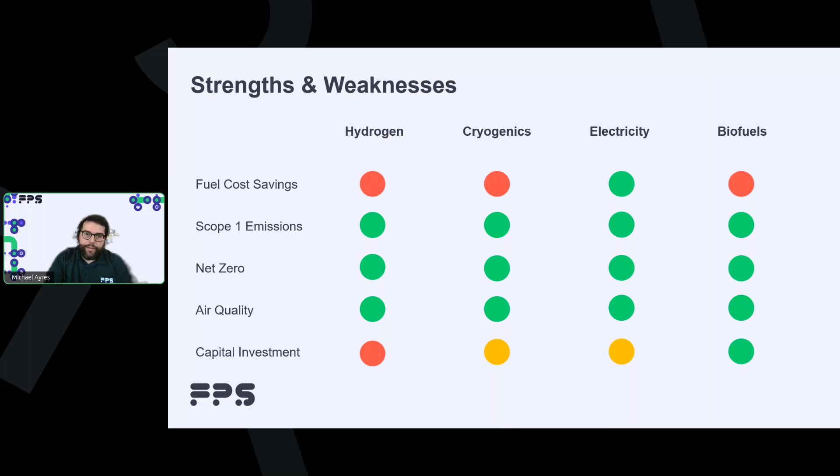Cryogenics and electricity are somewhere between hydrogen and diesel technology in terms of cost premium, and that's principally driven by volume. And then you have biofuels, which potentially could have almost no equipment change in order to make them feasible. It's probably worth flagging the reason why we can't simply adopt biofuels at this time, which is to do with the availability of feedstock.

For sure, it's possible to get HVO in significant quantities, or biomethane, such that you can perhaps decarbonize an individual fleet. And many fleets are using this fuel at the moment as a really valuable part of their transition. It bridges a gap in the short term, whilst the other technologies on that list are in the development phase. However, there's insufficient biofuel feedstock to enable us to completely decarbonize the commercial vehicle fleets that we operate in the UK, and so they can only ever really be a transition technology.

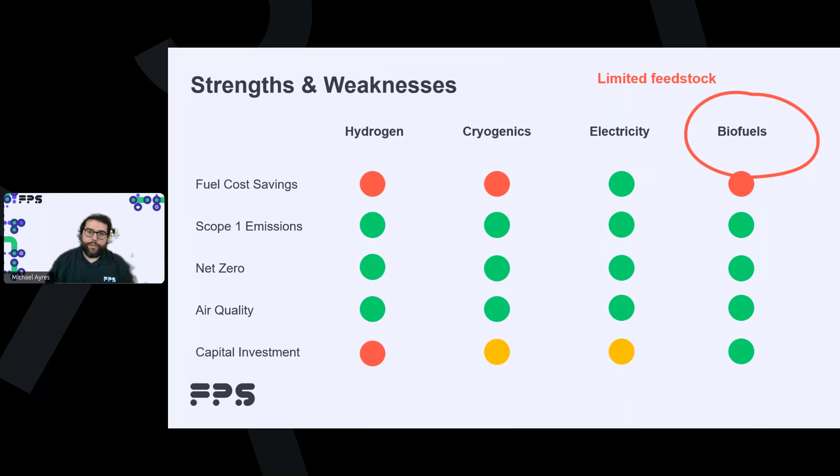So one of the questions that we get quite frequently is whether electric transport refrigeration units can be cost effective, given that we believe this to be the most likely long-term solution to decarbonising transport refrigeration. And the answer to that is that it depends. It depends on how efficient those TRUs are. It depends on what you assume about fuel costs. It depends on how expensive you think they are to purchase, the duty cycles you're doing, and even factors like the weather.

But what I thought I would do today is share some economics as we understand them, because it's useful to put numbers around a situation like this. And I think that we can show you some of the dynamics that we see when we're looking at deploying electric transport refrigeration units. As ever with transport refrigeration, many of the numbers are in debate, so we'd certainly be interested to hear from anyone who thinks that the numbers are different to the ones that I'm about to show you.

So I'll start by giving you an indication of the technology assumptions that we've used for this analysis. So we've got capital costs for purchase of single and multi-temp fridges. We have fuel costs on a pound per litre and pound per kilowatt hour basis. These slides were made prior to the start of the conflict in Iran, and so may be adjusted as a result of that over the coming months.

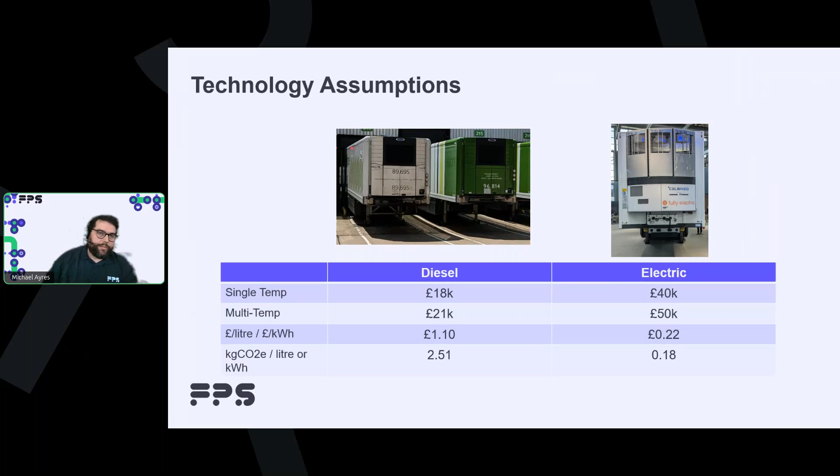The next thing that you need to know if you're about to compare the economics of electric refrigeration with diesel refrigeration is how much fuel the transport refrigeration unit is likely to use. And the answer is that it depends as well. It will depend on the transport refrigeration unit; there are dramatic differences between models and brands, and also the age of the transport refrigeration unit will make a difference.

There are differences in terms of insulation, set points, operating bands that you set the fridges to, the duty cycle that you put them on in terms of whether you've got set points for frozen or chilled, how many door openings that you have, the length of those duty cycles, and also the weather can affect that.

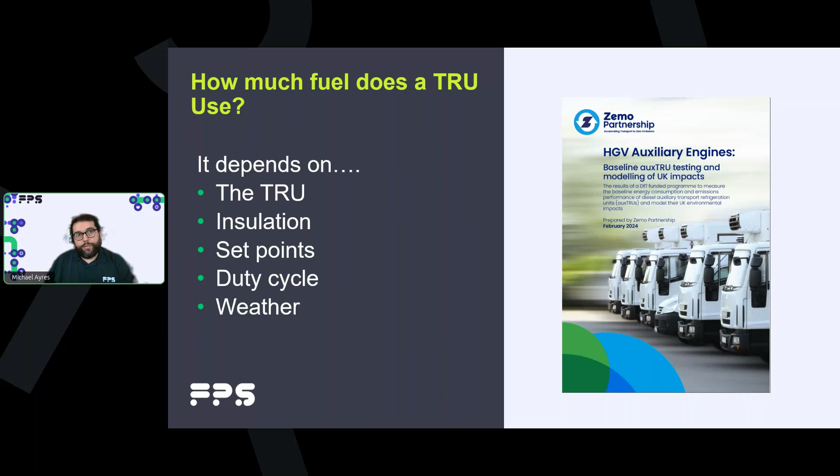As a useful start point for this type of analysis, there's a generic duty cycle that was developed by the Zemo Partnership to try and quantify the fuel consumption and emissions impacts of transport refrigeration units a few years ago. I can give you an overview of the cycle. It's highly simplified compared to the multi-drop operations that some of you may be undertaking, but it's useful in order to be able to drive a comparison.

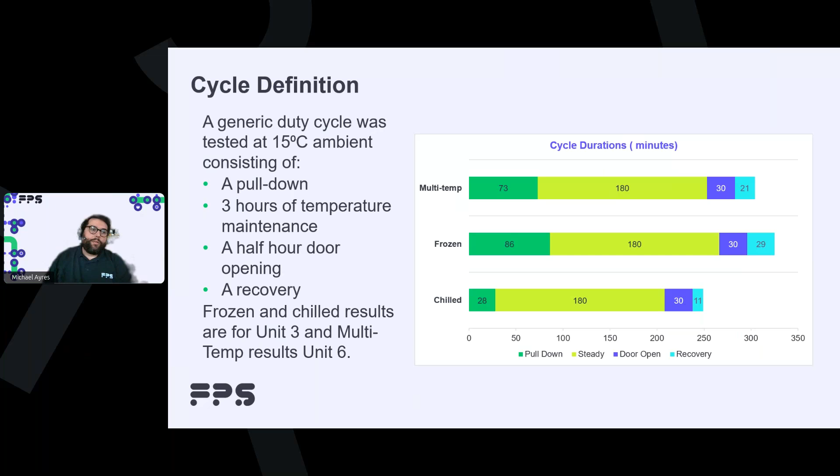So the testing took place at 15 degrees C ambient temperature. The duty cycle started with a pull down, which took varying times depending on the set point that was trying to be achieved and the fridges. And then a consistent 3 hours of temperature maintenance, a half-hour door opening, and then a recovery. Through this analysis, we've tracked frozen and chilled results, as well as multi-temperature results, so you can see the comparison between them.

So each one of those individual duty cycles used a different amount of fuel. As many of you would expect, the least fuel was used for the chilled duty cycle, an intermediate amount was used for frozen, and then the multi-temperature configuration actually used more fuel in this set of testing.

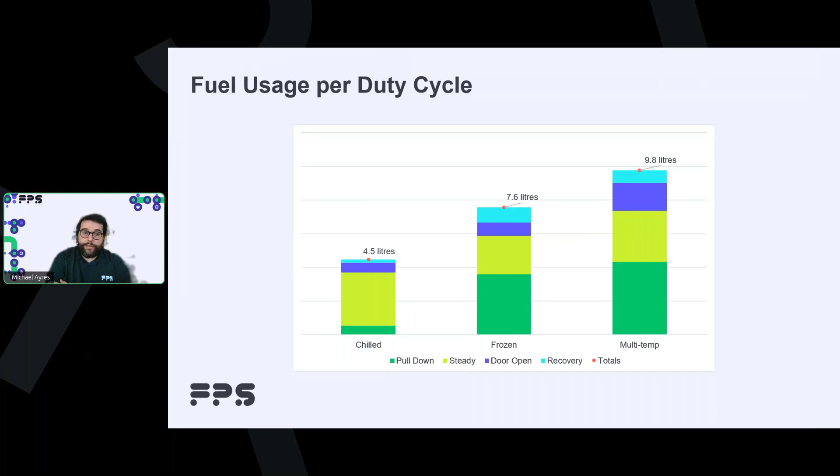The other feature you'll notice of the fuel usage profiles that you can see here is that for chilled, the most energy intensive part of the duty cycle is ongoing temperature maintenance over an extended period. Whereas when you look at frozen operation, the pull down process is much more energy intensive, and that has implications for where that energy consumption is likely to take place.

Now, few, if any, operators do just one shift per year, and so you need a mechanism of understanding how those individual test results may translate into years' worth of fuel consumption. So what we've done is looked at a model of the number of shifts like that you might complete across the week, and used that as a driver for our sensitivity analysis, going from doing 5 shifts per week, which would be 5-day-a-week operation, single shift, all the way through to 7 days a week, triple shifting the fridges.

And you can see in this chart here what the distribution is of implied annual fuel consumption. At the very bottom, it's 1,600 litres of diesel a year. At the very top end, you're knocking on the door of 11,000 litres per year.

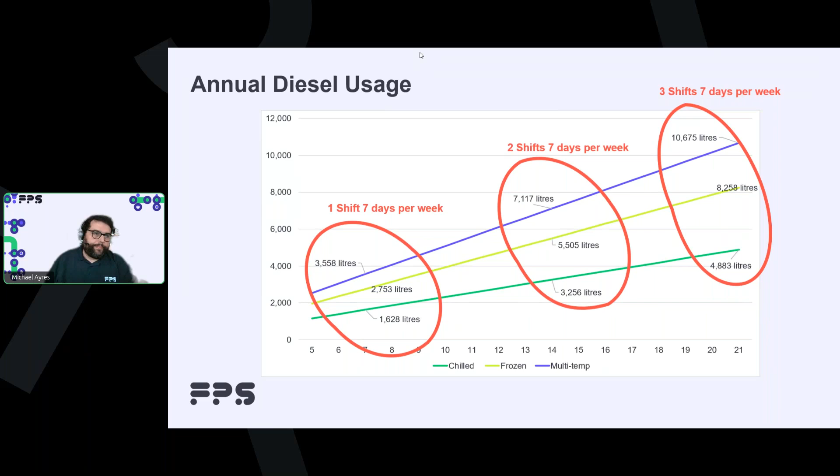Now, if you have got an idea of what your fuel use is, you need to have a view of what your likely diesel consumption and your likely electricity consumption would be to accompany that. Actually, it's relatively straightforward to perform this conversion. We know what the energy density of diesel is. We know the likely part load efficiency of a diesel engine. We know the likely mechanical efficiency of a drive shaft. So we know probably how much of every litre of diesel's potential is going into the shaft of the vapor compression cycle to cool the fridge. And the answer is probably about 2.4 kilowatt hours of that initial nearly 10 kilowatt hours of energy that you have.

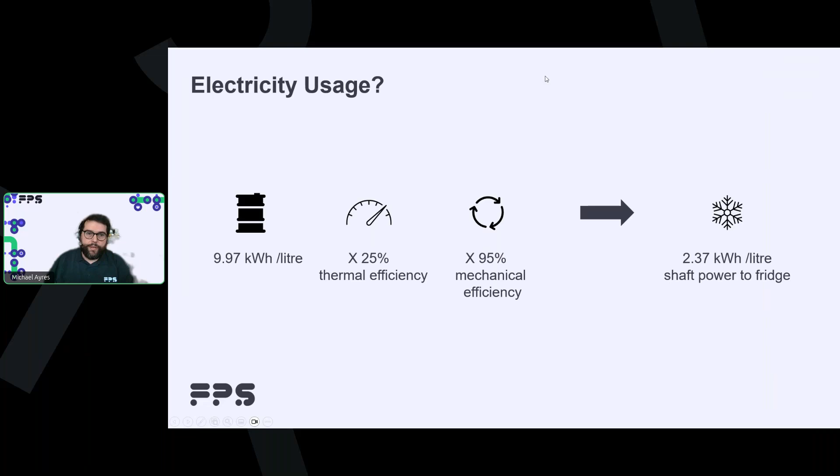It's a little bit more complicated than that because there are differences between electric transport refrigeration units and diesel units. It might be in terms of motors for braking energy recovery. It could also be solar, which is an incredibly popular component in these systems. If you look on a generic basis at a 10% capacity factor, and you imagine that you can cover the entire roof of a trailer with solar panels, you can get quite impressive quantities of energy generated. You can see, for example, with a single shift chilled operation, it's 160% of the total required energy. For the more energy intensive cycles, you'd end up around about half or a quarter.

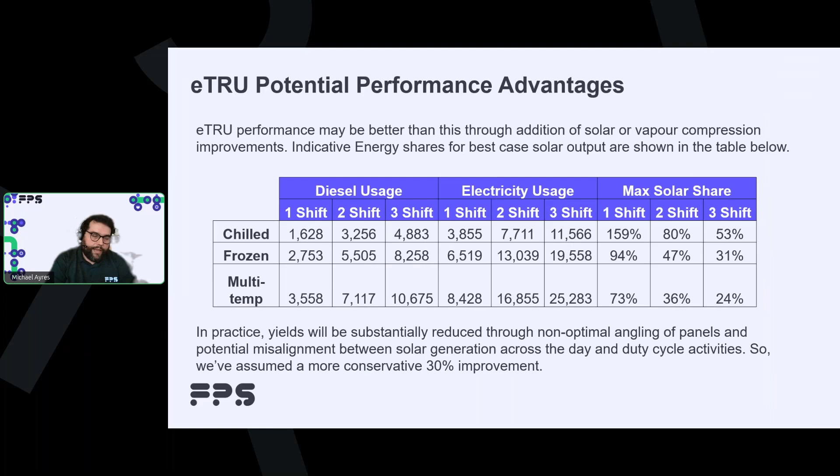In the real world, the results will be less attractive than this, because the solar panels tend to be not optimally arranged in terms of angle to capture the maximum sunlight. Also, solar generation may not always coincide with when the energy is required for the trailers. There may be a misalignment between duty cycle and operating times, for example. And so we've assumed for the purposes of this analysis that an ETRU is maybe 30% better than the diesel benchmark to account for these various factors.

So if you put those factors that I've outlined all together, what that gives you is a point at which you can achieve TCO parity for an electric versus diesel fridge. If you're doing chilled only operation, looking at a 7-year lifetime for the asset, you probably need to be running it about 13 times a week. If you're running in frozen mode, it could be only 8 times a week. And for the multi-temperature example here, it's about 9 times a week. Because it's cheaper to run the electric fridge than the diesel fridge, obviously the TCO use case favors higher levels of utilization.

Another way of looking at this is what the paybacks would likely be for the increased capital investment for the electric fridge in comparison to the diesel fridge. If we're looking at single shift type operation, this analysis would suggest that you're somewhere between 8 and 13.5 years payback. Double shifting brings you down to 4 to 7 years, and if you can get triple shift operation out of this equipment, then you get down to 3 to 4 years payback, which begins to become very interesting.

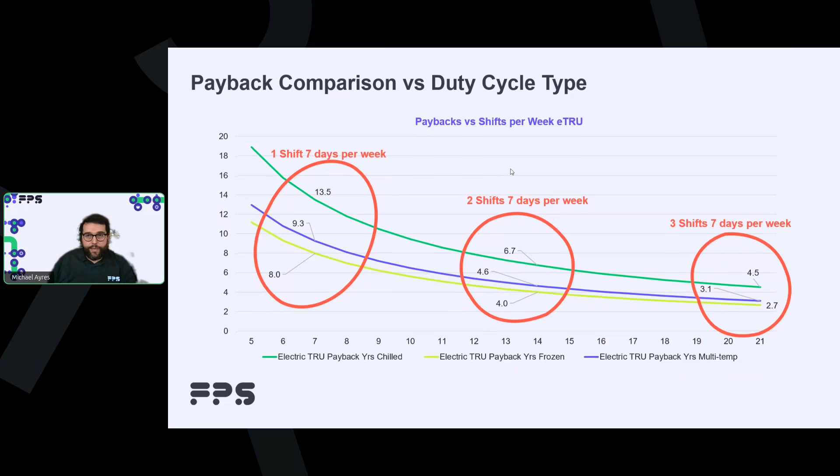So I guess the takeaways that I have from this are that ETRU economics are potentially pretty attractive, and attractive under a range of different use cases, and this is something which we think will only get better with time as ETRU production begins to achieve scale economics, so you get cheaper fridges with a smaller cost differential. The thing to note, though, when we're thinking about trying to achieve a net zero target, is that even as these fridges become more competitive, they will be part of a multi-year fleet transition, which is something that we see in the van and truck sector, where fleets may take 7 to 10 years to transition. And so there's a question about what happens in terms of emissions in the intervening period.

The other thing which is worth mentioning is that all ETRUs will probably at some point need to be plugged in, so there's an infrastructure piece as well that needs to be considered. And often when you look at van and truck deployments, one of the hardest bits to complete is actually the infrastructure side from a cost perspective.

Now, it's a very different situation for transport refrigeration to vans or trucks. Diesel vans and trucks can make little to no use of electric vehicle charging infrastructure. However, that's not the case for diesel transport refrigeration units, because the standby mode enables these devices to be plugged in when they're in distribution center environments.

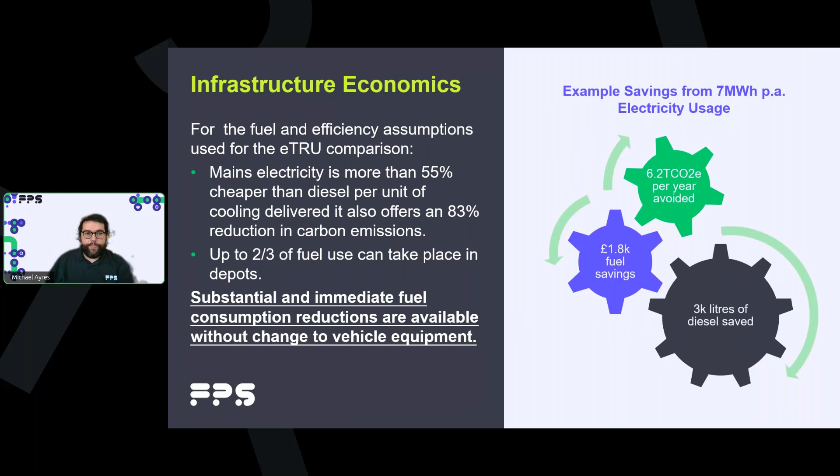But again, the economics are very tightly related to how much these assets are used. So you can see on the left annual fuel savings versus electricity consumption per plug. The light green shaded area is the range of uses that we see on sites that we manage across our estates, typically from about 5,500 kilowatt hours per year up to 11,500 per plug at some sites. And so those plugs are yielding for operators between about £1,600 and £3,000 a year in net fuel savings.

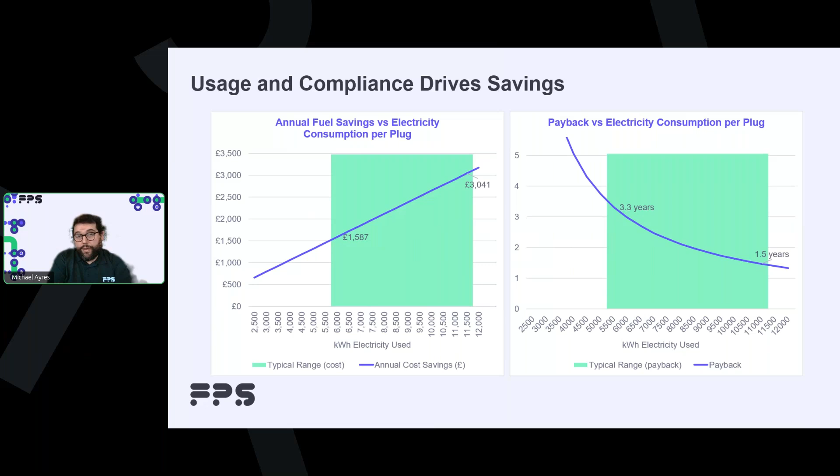Then in terms of how quickly they pay back, because there's significant investment to be made in both the plug itself and the civil works to support them, we typically see paybacks in the range of 1.5 to 3 years, which is quite attractive.

The carbon emissions savings associated with that level of fuel saving are quite significant too. Around the mid-range, you can see that the carbon savings are broadly equivalent to what you might get from substituting a diesel TRU for a chilled eTRU, and towards the upper end you're achieving a meaningful proportion of the total savings delivered by even a more energy intensive frozen or multi-temp fridge operating a double shift 7-day-a-week pattern.

So the reason these higher levels of energy consumption are possible is because multiple vehicle assets can use a single plug, and so it gives you potential to deliver a higher level of carbon savings per unit.

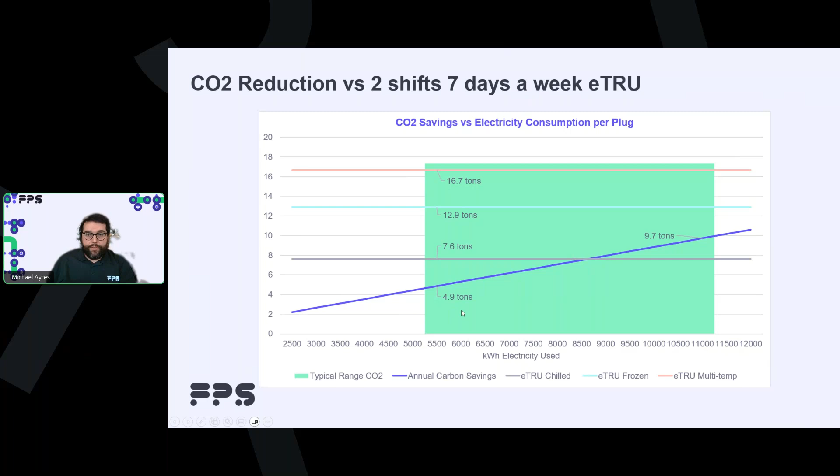Another way of looking at the relative economics of these two systems is how much it costs in upfront capital investment to save a recurring ton of carbon dioxide per year. Infrastructure costs between £400 and £800 per ton per year. And at current prices, ETRUs cost about 3,000 to 3,100 pounds per ton of carbon mitigated per year.

And so the takeaway from this isn't that you shouldn't do ETRU fridges, but simply that the infrastructure to support them in the long run has an immediate payback now and an immediate impact in terms of your carbon emissions. It will enable you to move closer to your net zero targets whilst ultimately working to that goal.

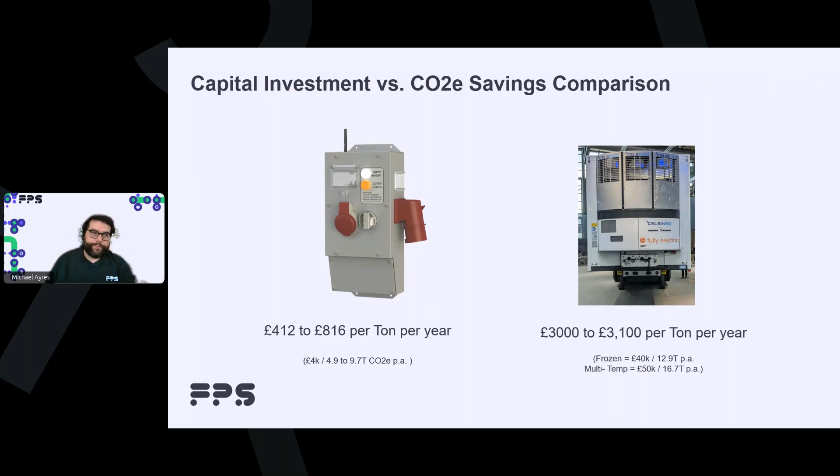So if plugging in fridges is such a great idea, how come not everybody is doing it already? Typically we see four things that are delaying this transition for some of our customers. First is around the business case.

Typically the standby infrastructure in distribution center environments is very lightly monitored, if at all, which means that the fuel savings I showed you from that theoretical case on the slides aren't being tracked in real time, and that can be a problem if you're looking at a multi-year rollout of infrastructure where the finance departments are looking for evidence that the fuel savings promised at the initial project were actually delivered. So there's a lack of transparency in terms of usage.

Often fleets have problems with compliance and driving usage. This can be because the drivers don't understand the value of plugging in. They don't understand that there are fuel and carbon savings associated with it, or they're not communicated to drivers.

Similarly, the drivers in deployments we've been involved in have expressed concerns about infrastructure reliability and not wanting to, for example, get out of a cab on a cold November evening if they think the plug infrastructure at the site is always broken, and so it'd be a wasted trip. So there's a link between guaranteeing infrastructure uptime, communicating this to drivers, and achieving driver compliance.

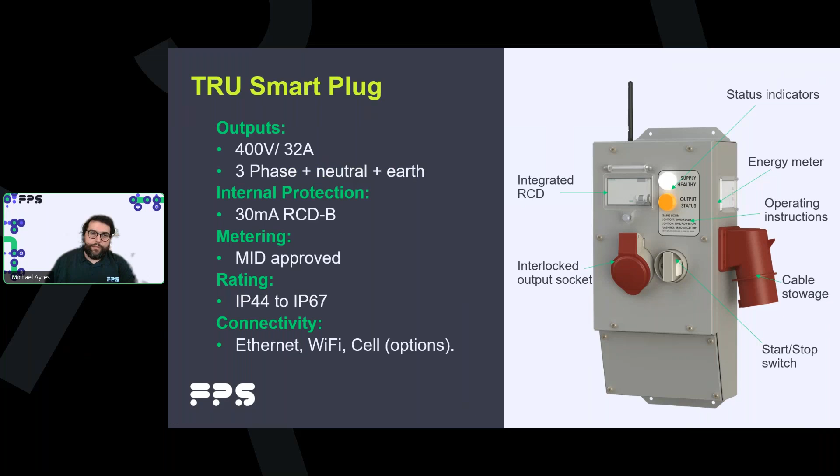The other side to this is the management platform. It's more than just talking to these individual plugs. The platform is typically coupled to yard management systems. That's useful because it enables you to identify what vehicle is on what bay, which can help with compliance tracking, but is also very useful if you're going to make interventions with regard to load. For example, you wouldn't want to turn an alternator fridge off, or turn off an ETRU that was partway through its charging cycle and scheduled to go out shortly.

We also track power usage at the site in order to decide whether to intervene with load control, and also weather. Doing all of that enables us to continuously report cost and emission savings, which can be used to support compliance and the forward business case for investing in the infrastructure. We issue alerts if any of the infrastructure goes down, so that there are no wasted trips to plugs that don't work, and broken plugs can be fixed quickly so they can carry on saving fleets money.

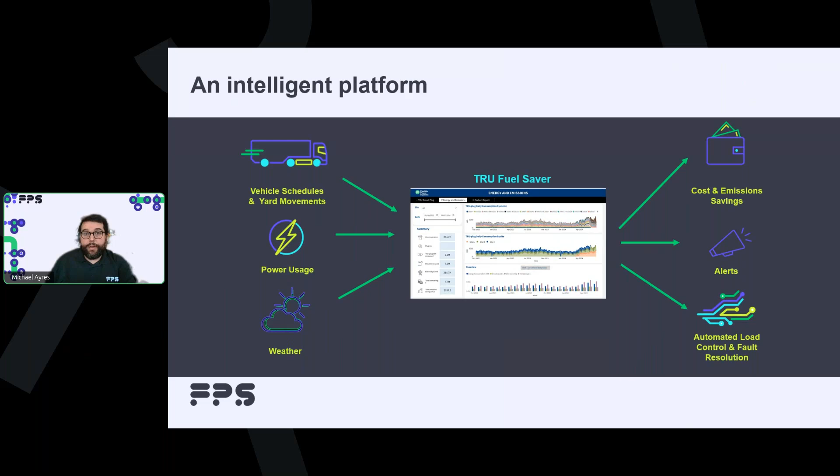We also have the ability to intervene from a load control perspective, and from a fault resolution perspective in these assets to keep them up, and also manage scarce power availability at sites.

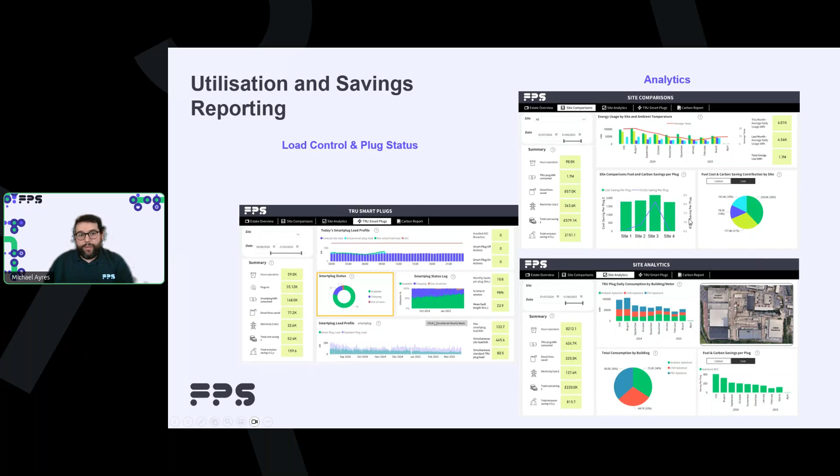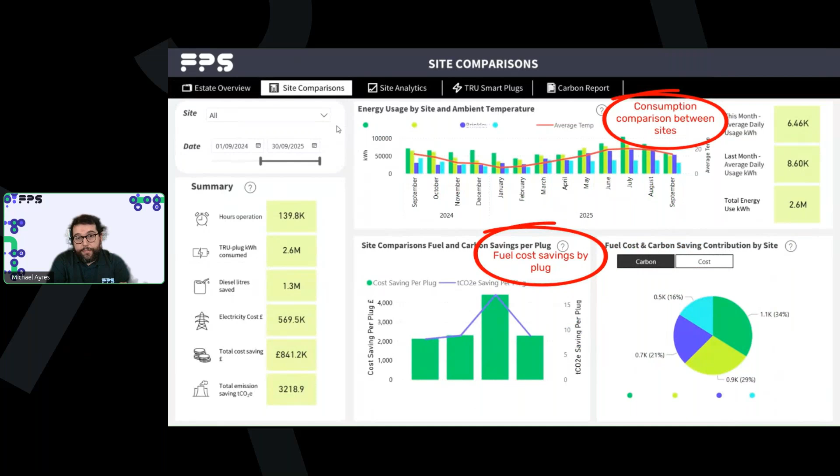This is what the system looks like. There's an element to it which has reporting of load control interventions, and another which is to do with analytics at both individual site level and individual site area level. There's a short demo here to show you what the implementation looks like. These are the comparisons between sites, which can be used to judge whether compliance is taking place.

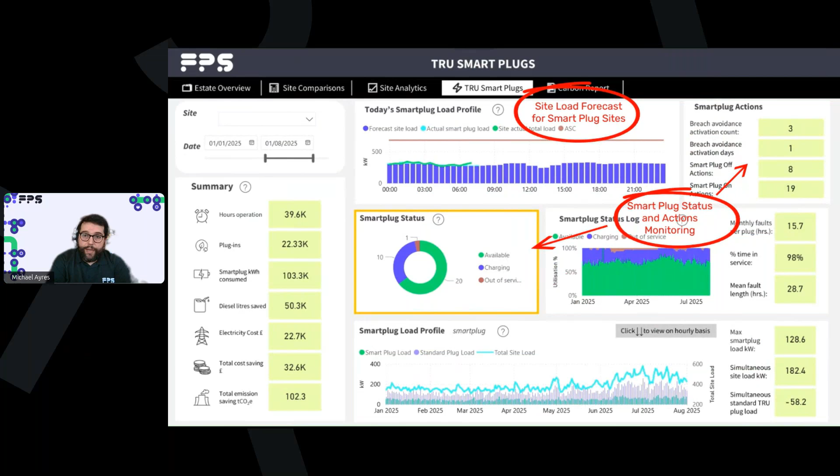Then at the individual site level there's the capacity to drill in and see whether specific warehouses on site are complying. And this is to do with the power intervention, so you can see how often interventions are being triggered in a given period to minimize power consumption at the site and avoid breaching site load.

Great. So that was a bit of a whistle-stop tour of the economics of transport refrigeration units on both the vehicle and the infrastructure side.